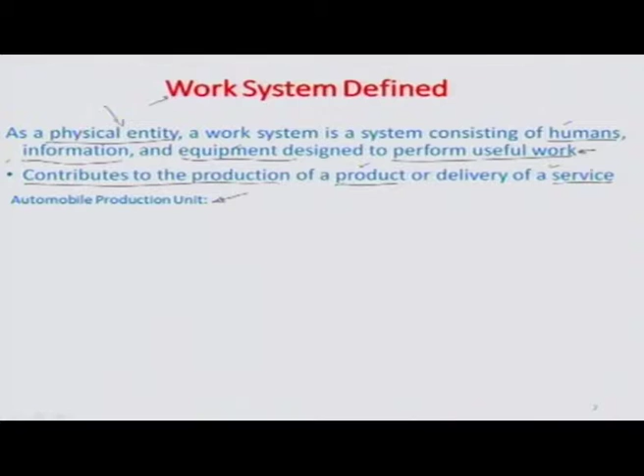So let us consider, for example, an automobile production unit, which is actually a work system. It is probably one of the most backwardly integrated work systems. If I look at the various levels across which an automotive gets produced, breaking it down into different aspects, it starts from a shop which gets the sheet metal and tries to press form it into various shapes. We call this shop the press shop.

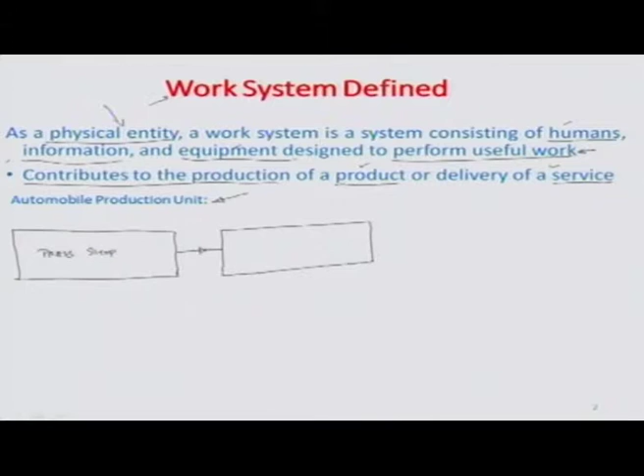From the press shop, there is a material flow of whatever has been pressed or formed into different shapes to go to the next level, which is the weld assembly—the point where the secondary manufacturing of joining together the different parts or components that came from the subsystem level of the press shop is done. From weld assembly, the automotive goes into a paint shop, which looks at the exterior as well as the interior of these assembled weld components.

These components are now slowly taking the shape of a vehicle. Finally, the automotive flows into something called an assembly shop, where components or functional units are integrated or assembled to the overall vehicle, including the chassis, the interiors, or the different opening and closing members related to the vehicle, and so on and so forth. This operation is known as the assembly shop.

Finally, it goes through an inspection process and from this inspection to a dealer or vendor, who would be eventually responsible for developing an interface with the customer—taking information or buying whatever is produced from this automotive unit. So this complete automobile production unit, with these various categories I have shown you, is typically a work system.

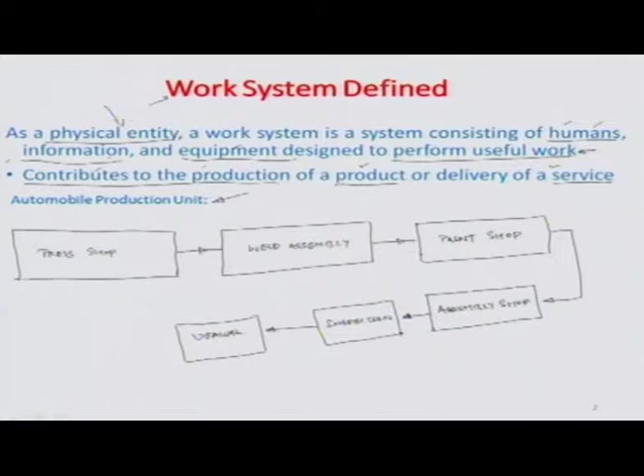Now, if I looked at the involvement of these three important components, namely humans, equipment and information, they are all available at plenty in some of these different shops. For example, there is a relationship between how the material flows into the press shop from a sheet metal manufacturer, which would involve people who are associated, probably not directly but indirectly, to maintain or augment the production system.

So, some people and information associated with the production of the press components or the press sheets of a press shop. There are many equipments here, including mechanical presses, hydraulic and pneumatic systems, inspection equipment, etc., which is being operated in unison in order to do different operations to the sheet.

In fact, a series of such mechanical presses put in line are known as a transfer line, more appropriately known as transfer presses, where there are different dies which do the press forming operation on the sheet metal as it comes, and between the different stations you have an auto carrying mechanism from one station to the other, so that you can make the transfer line completely independent of human intervention.

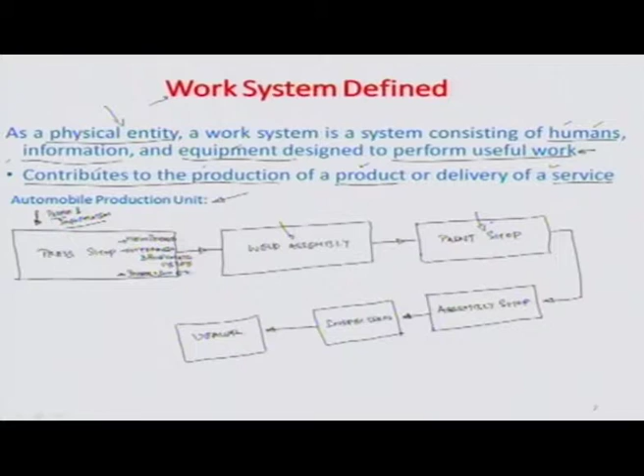A similar thing goes into the paint shop, where there are associated tasks with respect to the electrodeposition coat and spray coatings which happen on the interior and exterior of such cars, where again people and, as far as possible, mechanization and information flow are used for accomplishing the painted body structure.

The most amount of involvement of people and workflow in such automotive production units typically happens at the assembly stage, where there are many operations which simply cannot be automated, requiring people. Whenever there is involvement of people, there must also be information given to them, collected from them, and passed from one station to the next or vice versa, so that there is smooth operation and flow in the system. Therefore, this whole system can be considered a very complex work system.

Now there are many things associated with such systems, and one of the main aspects whenever there is involvement from people, or involvement of processes, or involvement of information flow, and that with respect to automated, highly automated equipments, there is going to be the need for a very organized study of all these individual participants. The whole idea behind such organized study is to ensure that the system works uninterruptedly and also at its lowest cost as well as its most optimized output. So there has to be a quantitation of all these aspects and an organization of the knowledge base in all these aspects for defining the work system in a proper manner.

This topic, what I would be going through today, is in a way to summarize some of those tools which are needed to understand the work system in terms of its organization, in terms of its operating at some optimal best conditions, and in terms of how to maintain those optimally best conditions with time. So let us look into a little more detail of some other work systems.

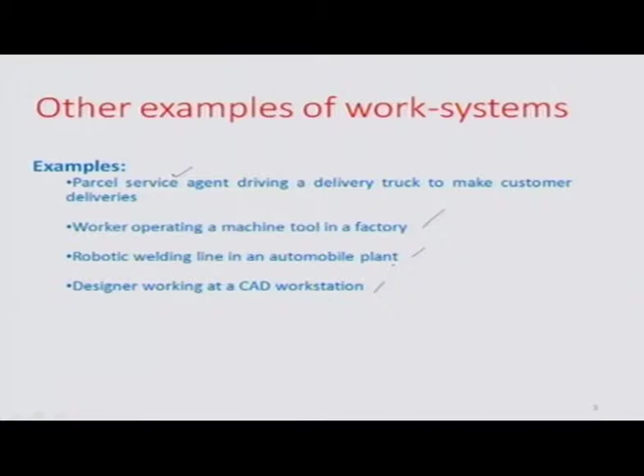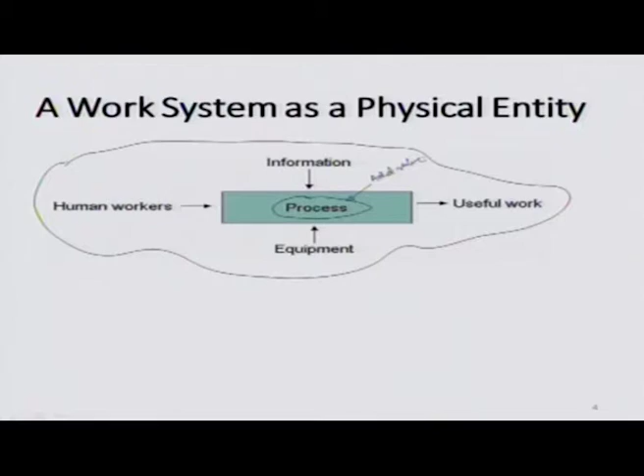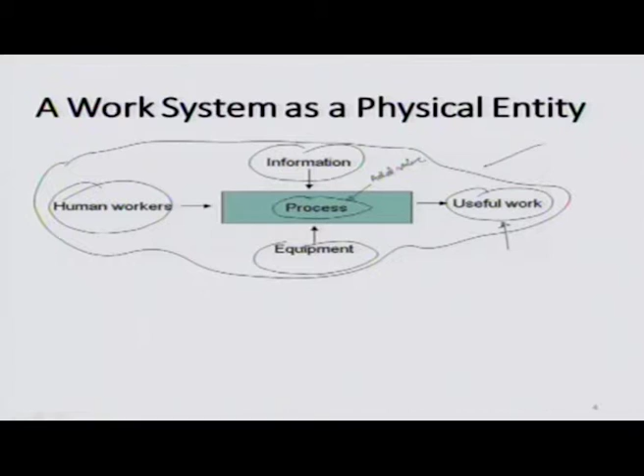So having said that, what I did mention in the last two slides is captured here on this small schematic, which talks about how any work system would have a process, and this process typically would add value to some of the inputs, which could be raw materials or even information or services. This would actually involve people, involve information, and involve equipments to produce something which is useful for the society, which could be in terms of a service or a product or any other work that is being delivered by such a system. So this is in a way summarizing what I said in the last two slides about what could really be a work system as a physical entity.

Now when we talk about some modalities associated behind such work systems, there is obviously the involvement of methods. So can we really identify what are the tasks or what are the jobs which are involved for the associated humans which are involved in the work system? So an analysis and design of the same falls under the purview of work methods.

For example, let us say there is an assembly line, an automotive assembly line, and there is a person who is responsible for mounting the two wheels on one side of the car to the disc brake on the front side and the drum brake on the rear side. So his task and job may be related to a lot more than what you see as just assembly of the tire or the wheel to the automotive.

It may be related to doing some sub-assembly related to the wheel, which is offline, carrying the wheel all the way to the automotive on the line, putting the wheel in place on bolts coming out of, let's say, the disc or the drum, and then trying to individually tighten some of the hexagonal nuts to all those bolts, either through an automatic machine which would turn all these nuts together, or individually using pneumatic guns to tighten all the 4 nuts, and then torque them at a certain value to establish that they are safely tightened and torqued.

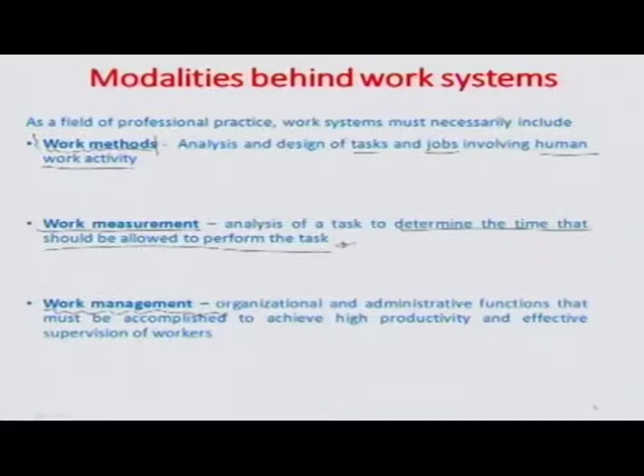So if we looked at all the jobs and occupations, there are many kinds of people involved, particularly in the human aspect of the work system, and we can typically categorize such people into 4 broad domains or categories. One are the people who are associated directly with the product, the person who is making the product, who is basically a production worker.

A person who is associated with ensuring that the product happens in the way it happens by moving in a timely manner, supplying material in a timely manner, supplying the necessary people in a timely manner. And so therefore, there are certain logistic workers.

This could be supervisors or materials professionals or people related to maintenance who would ensure that there is a smooth flow between the different work centers of the tasks which are being intended to add value on the product chain.

And then there are people who are associated with providing some kind of a service. For example, some people are associated with providing domain knowledge or information about the product to people who are new into the system and who are untrained. Some people are associated with providing service related to ensuring the basic comfort and safety of the people who are directly associated with the product, who are production workers or even the logistic workers. So these people are also very important components as far as the human aspect of a work system go, and they can be called as service providers.

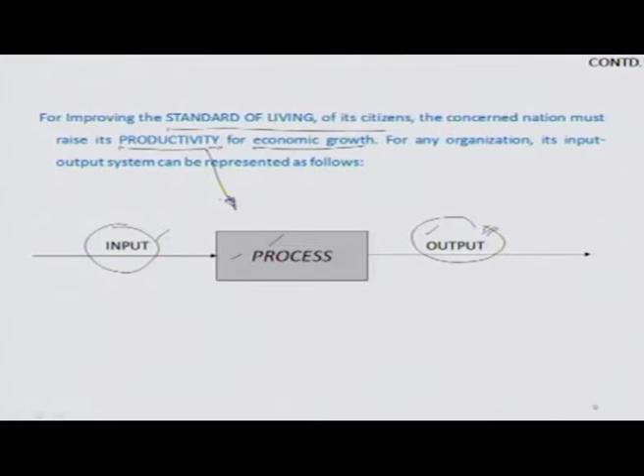So inputs again can be of various forms. I've already mentioned these, but just to give you a different perspective of the M's: man, material, machine, method, management, market, information or messages, and moment, that is time. These are the different M's which could be thought of as interparticipating within a process to take the process to its final destination, which is the output, either a product or a service.

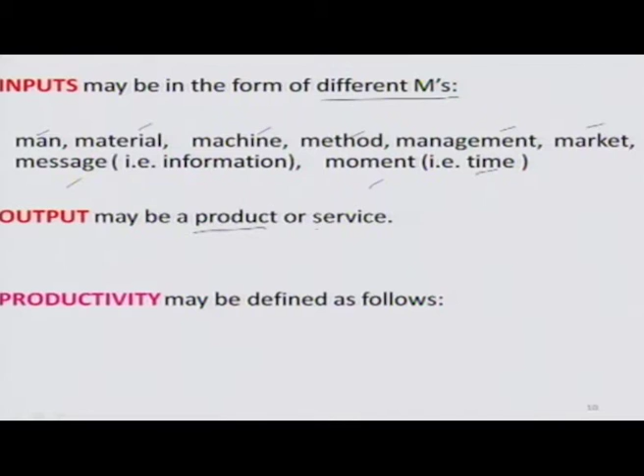And productivity in this case would be defined simply as the output by the input. So the idea is, can I take this up by changing the input to go down, so that overall there is a higher productivity increase of such systems, which would then start adding more and more value at lesser and lesser expense. So overall the standard of living can come up, or life can be better.

It may be noted that production, which is the number of products, is different from productivity. Production can be any number of outputs coming out of a process, but at what cost it is coming out is not considered when we consider production alone. What is important to us is the ratio between what is your investment or input to that output or production level which is coming out, and that is where the definition of productivity lies. So it is quite different from what we otherwise know in the standard way as production.

So the level of output of a given process relative to the level of input would definitely be the productivity, and the process can generally refer to either individual production or service operations. I'm trying to summarize what I said so far.

Productivity is an important metric in the work system, because improving productivity is the means by which worker compensation can be increased without increasing the cost of products and services they produce. So it is another way of making things less expensive and affordable to all.

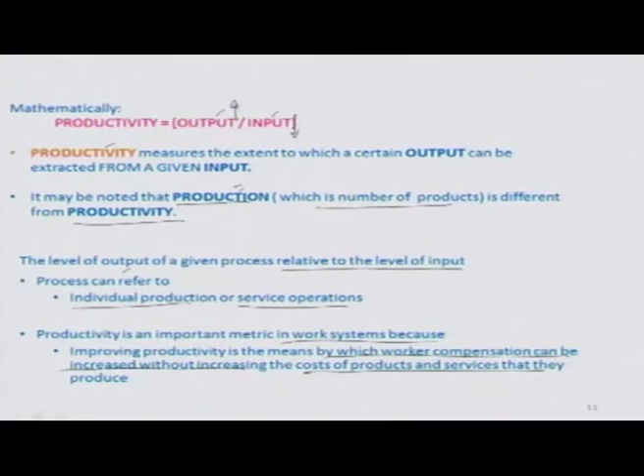You could say that just by using knowledge management, or by using the right things at the right place at the right time, let's put it this way, you get to a level which is the optimum best for producing the numbers associated with the product or services, probably at the same level of cost or even a lower level of cost.

And when it comes to this, there is no end to what you can do in terms of innovations, in terms of technology, in terms of systems improvement, so that this productivity can keep on rising.

Therefore, the job of a person who wants to apply ergonomics into daily life is to study a work system from that standpoint and try to bring as much innovation or Kaizen, as you say, to the work system - small innovations or small improvements - so that there is a sustained, continuous increase in the overall productivity level associated with the work system.